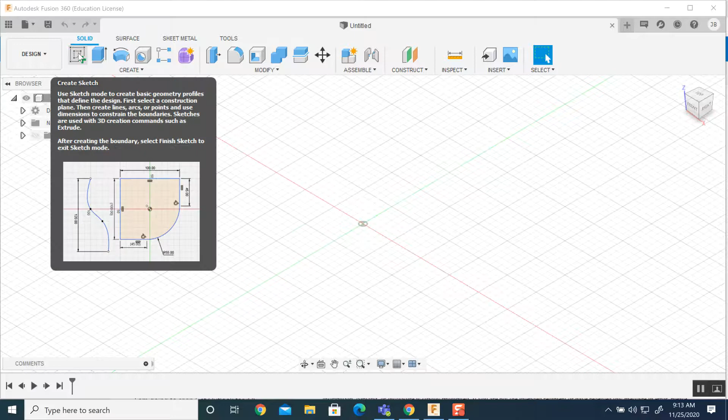So here's what you do to get started. The first tool you're going to go to, generally speaking, is always a sketch. You'll notice there's some tools here that allow you to create a sketch and then create an extrude or a solid. We're going to be using those two tools in a moment.

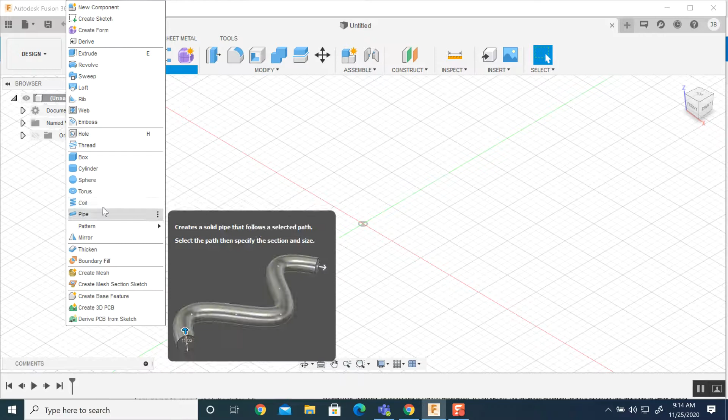There's also some other ones. You can create surfaces, so you can create other features like holes. You can click on here and it brings up a bunch of other things, like you can make coils, helixes, donuts, toruses, spheres, cylinders, just a regular box. You could create a box, but that's kind of cheating, because you'll see why in a minute.

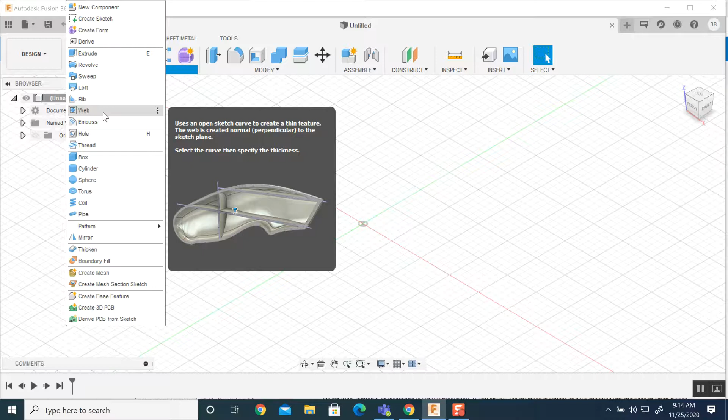And then hole, we're going to use that tool. Webbing, if we're making a part that could potentially be kind of flimsy, so webbing adds some ribs and thickness. Lofting or surfaces, very useful to make freeform shapes. Sweeping along a path. So there's a lot of cool things in here. Don't worry about a lot of these features because the basics are still the basics.

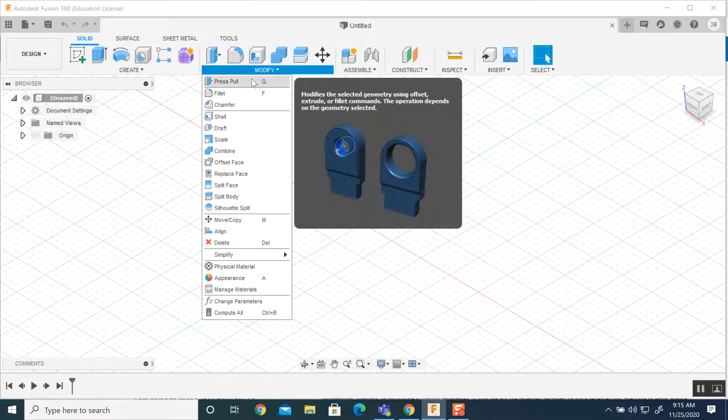And then there's a bunch of other tools to modify or shape the models. We're going to use one of these anyways. And then there's some assemble and construct tools, but all we really need right now is sketch.

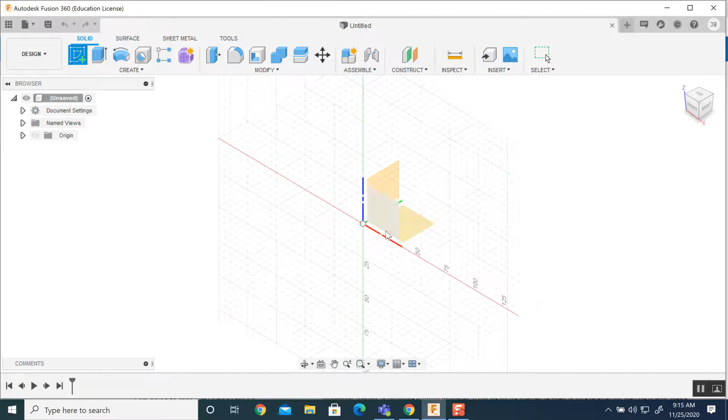So we're going to click this button and you'll see it's asking, okay, which plane do you want to sketch? Remember there's X, Y, and Z. It doesn't really matter which plane we choose, but I'm going to pick this plane down here, so we're going to sketch on the X and Y plane.

As soon as I click on it, the screen turns and brings it to a standard drawing view where it's looking straight on. At this point, I want you to create a rectangle — 2 point is fine, so you click on this one over here. And when you come over here, I want you to come right into that 0,0 center mark, that black and white little center mark.

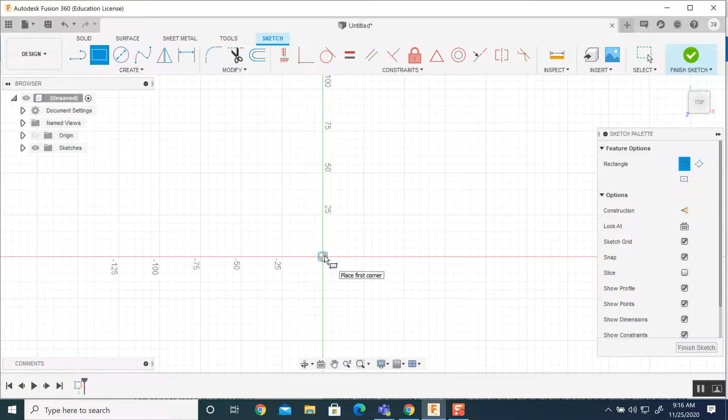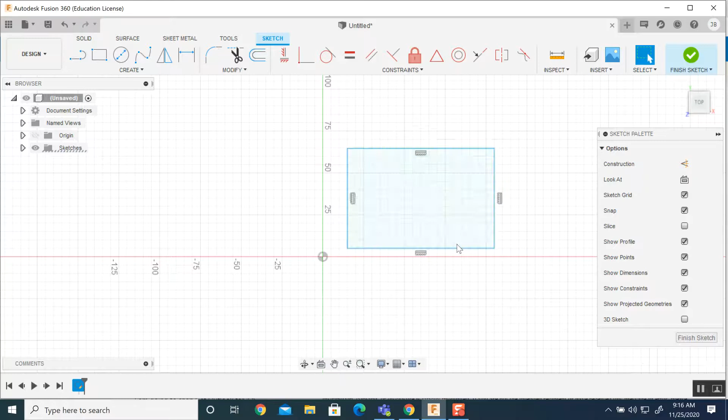The reason is, I'll just draw something out here, not put it at the center. The problem with doing this is I can actually take this and start to move this thing around and change it, move the whole thing around, and that's actually not a good thing to be able to do. We want to be able to keep sketches what we call constrained, kept to a certain size.

Now, you know we're making it 20 by 20, so you could just go like this and be happy — it's 20 by 20, which is great. But I'm just going to take a random rectangle at this point and force it to be square. The first thing I want to show you is, because I clicked on the center for the first point of my rectangle, that corner is actually secured right there at what we call the origin.

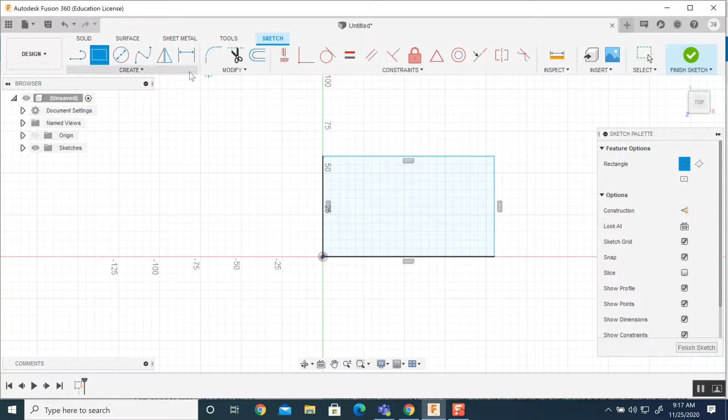You notice that the vertical line here and the horizontal line is black — these two are not black, they're blue. If I hit the escape key to get out of my latest command, I can resize this rectangle, but those two lines get longer or shorter to make sure it's still a rectangle — they don't move. I can't physically move these up or down. That's exactly what I want.

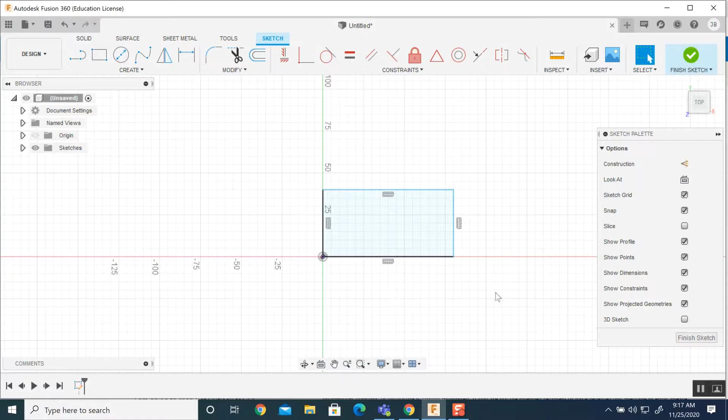So what I want to do right now, since we want it 20 by 20, is go here to dimension, sketch dimension, click on one of these lines, then click on another line, then click a third time somewhere above to place it. That's what we call placing a dimension. At this point, I'm going to go to my keyboard and put in 20, because we're working in millimeters — 20 is 20 millimeters.

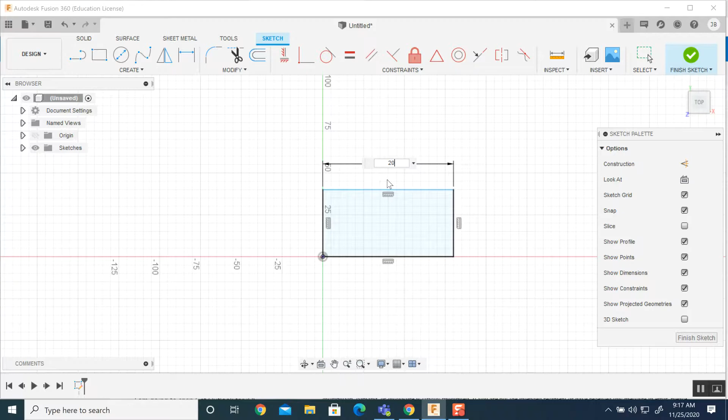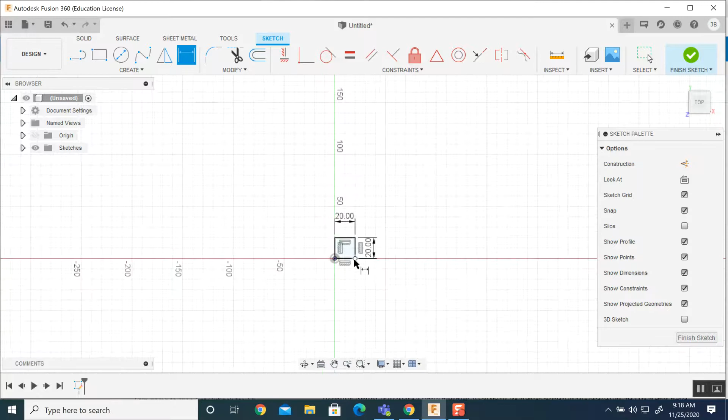And you'll notice that it shrinks it down to 20. Now I have to do the same thing. The sketch dimension tool is still active because I haven't pressed escape, so I can keep dimensioning. I'll click, then click again to place the dimension, and put in 20 again. Now you'll notice we have a perfect square. It took a lot to draw that perfect square, but it's important you go through this procedure every time to create a sketch.

You'll notice this perfect square, 20 by 20, and all the lines are black, which means the sketch is fully constrained. So if I hit escape and try to grab one of these corners, it doesn't allow me to move any geometry. It's fully constrained, it's good to go.

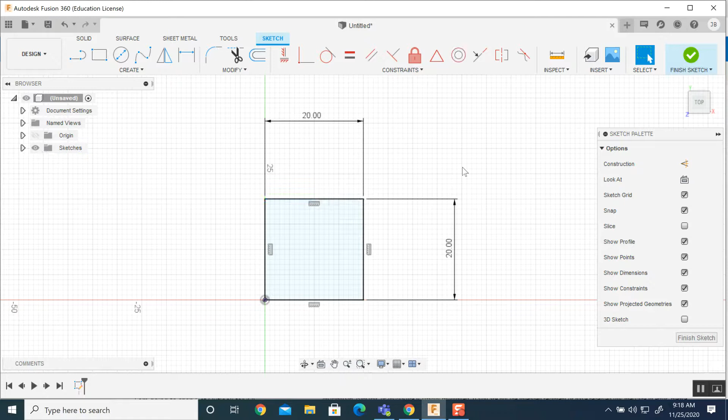So at this point we can go to the green check mark and say finish sketch, and we'll finish the sketch, and you'll notice it's just sitting there.

Now here's your first command that I'm going to use. You may have seen me zoom in and zoom out. Let's go through how to actually zoom in, zoom out, orbit or rotate, and then pan. I have a roller ball mouse. You do need a mouse - a trackpad does work, but it's a little harder to work with.

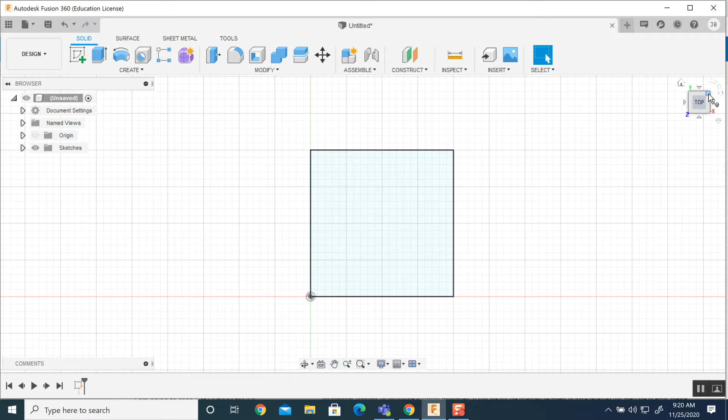Now I want to show you how to rotate. You can grab this box in the top right corner, click on one of the corners, grab it with your first mouse button and start to rotate it. You can do that, that's not a problem. But it's always hard to go up there all the time, right? It's a lot of extra work to grab one of these corners and rotate - it's a bit tedious.

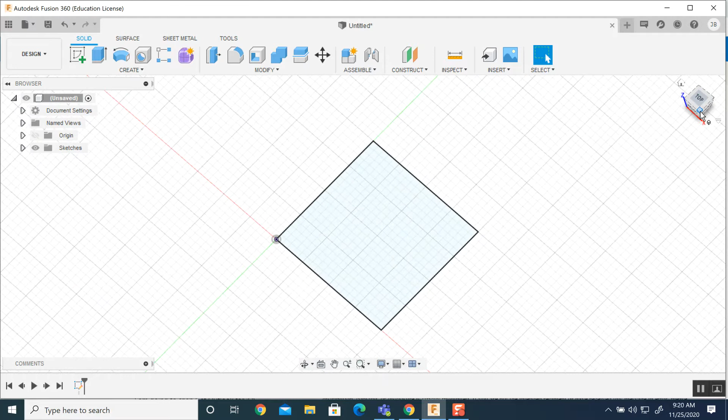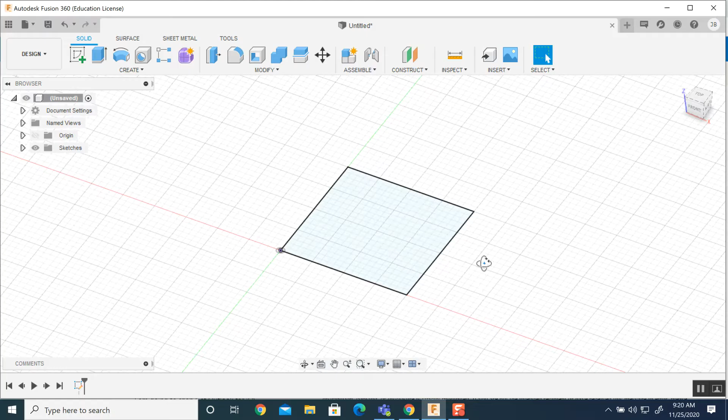So what I want you to do is hold the shift key, and then with your middle mouse button, like you were panning, now actually rotate. This is super cool to get used to doing. You can see the origin is still there, you can see the X and Y axis - yep, that all looks good. I'm just going to create this 3-dimensional view. It doesn't even have to be perfect, it can be almost like a little side view.

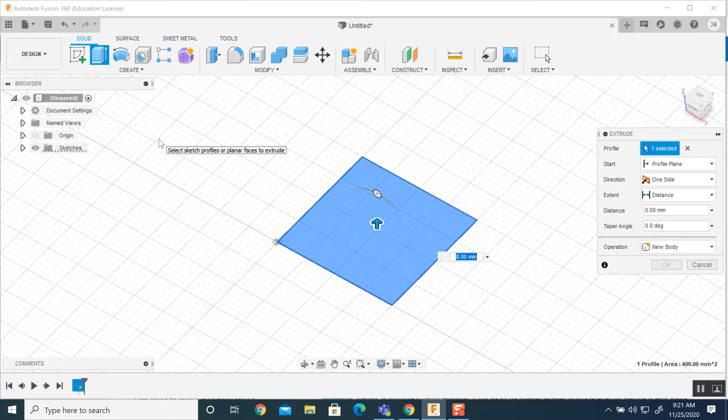So what I'm going to do now is extrude this. We want a perfect cube that's 20 by 20 by 20. When we hit extrude, it's taking that sketch - like a cookie maker - cutting it out and making a solid out of that profile for whatever distance you tell it. So in this case, I'm going to say I want to go a distance of 20 millimeters. I hit 20 in distance, and I want to create a new body, so it's going to just create a new part.

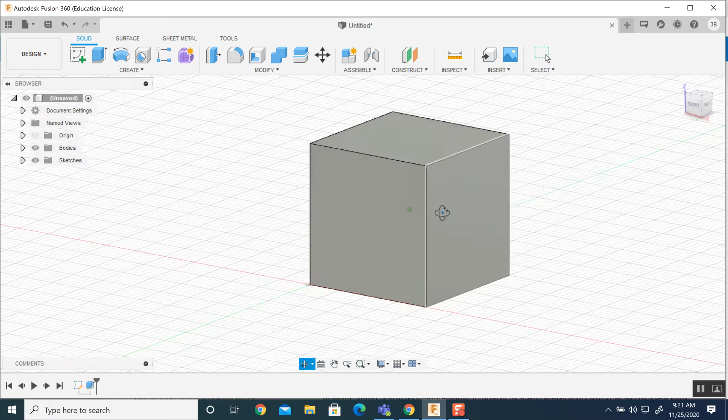So there you go, there's your cube. Very easy - you can start rotating, you can pan, you can rotate. Look around your cube and get used to the commands of going around. All right folks, so there's the first making a cube, and I'll be back online here in a second to show you how to add all the sides.